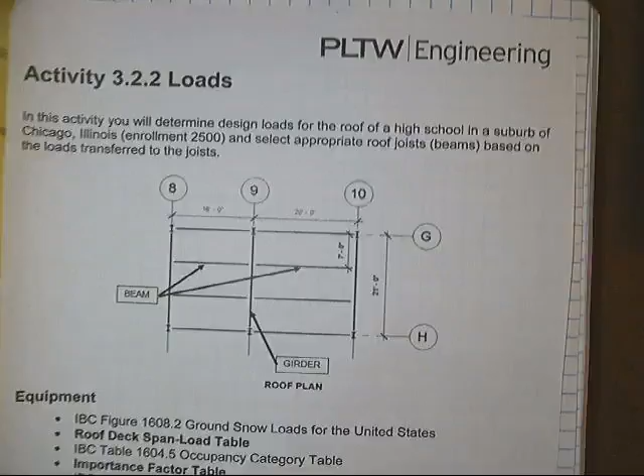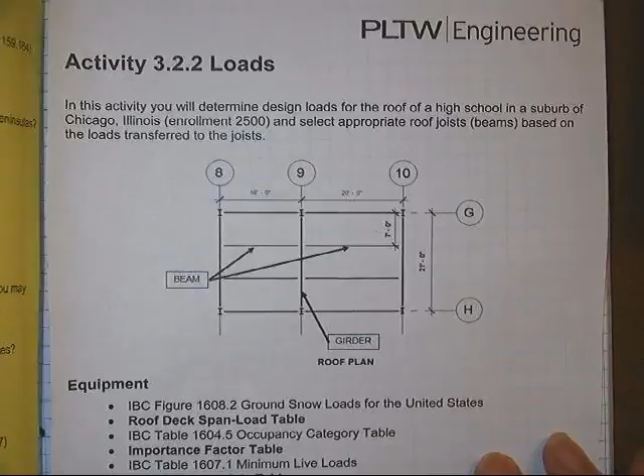Okay, here we are on activity 3.2.2, loads. You should have watched the PowerPoint and taken notes. You will be using the information from the PowerPoint along with looking up information online in your IBC 2012, and these are the different tables you're going to be using.

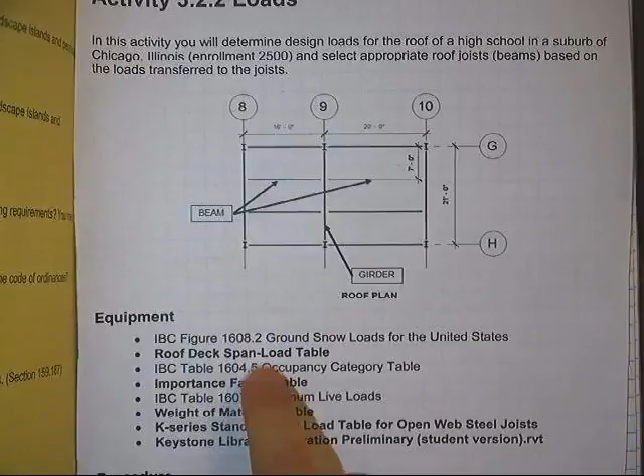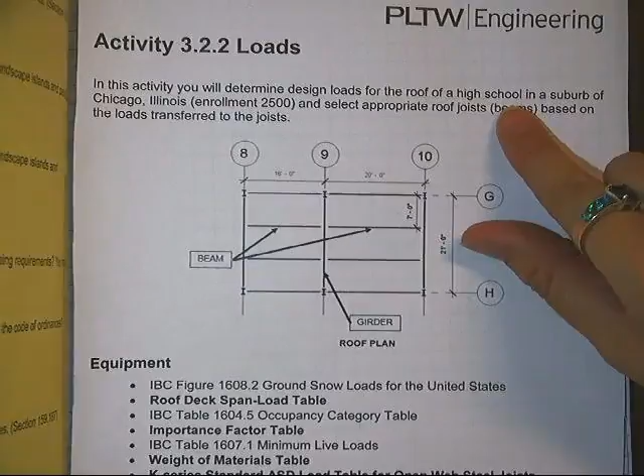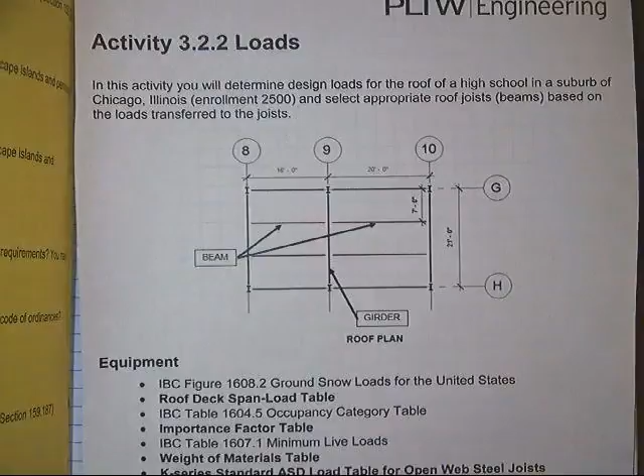It's important to note that this first part, number 1 through 7 on this activity, is this scenario where we're looking at a high school and we're going to do the loads for a roof of this high school located in Chicago. On number 8, you'll do these same calculations for your library, but for now we're doing it for this high school example.

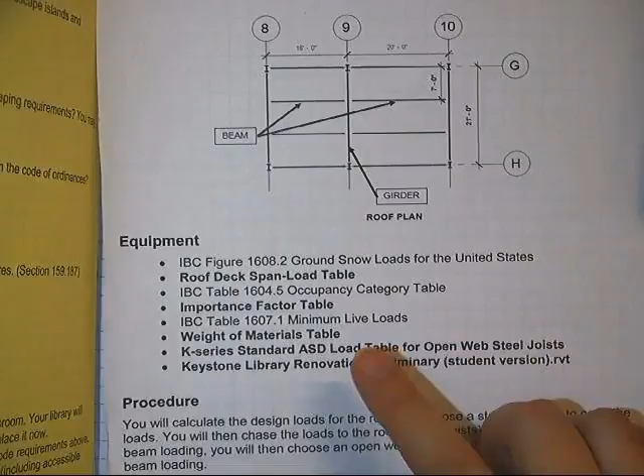You will be using all of these different places to look up various information to answer the different questions here, and we will have to reference back to this picture.

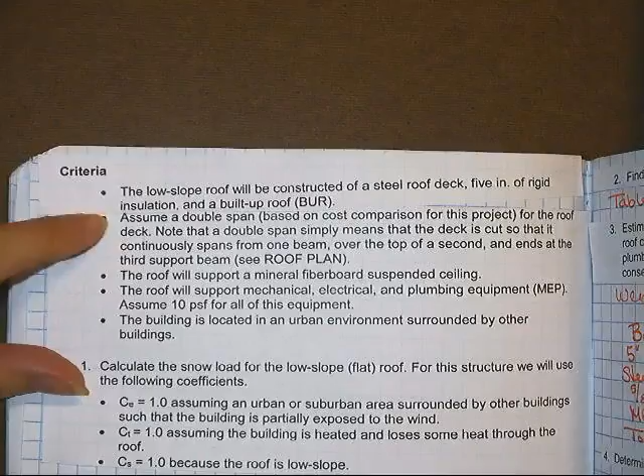You will be using this criteria right here. This is describing the information we would need to know for the high school. You'll then use your own information when you get to your library on number 8.

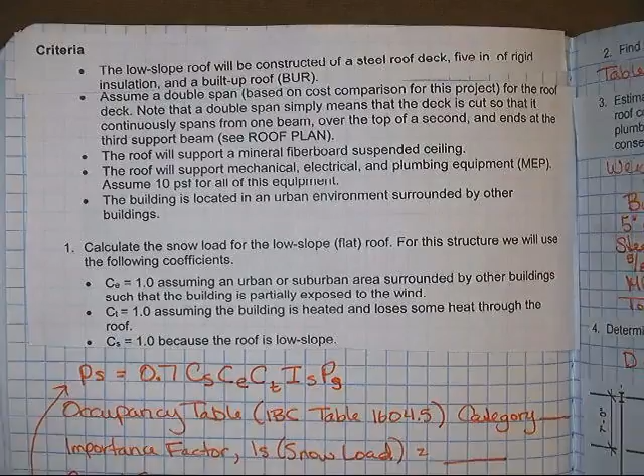You are expected to show all of this work in your notebooks and do all the calculations. I'm going to get you started here on this video, but when you work it in your own notebooks, you do need to show all the formulas and all the work, just like normal.

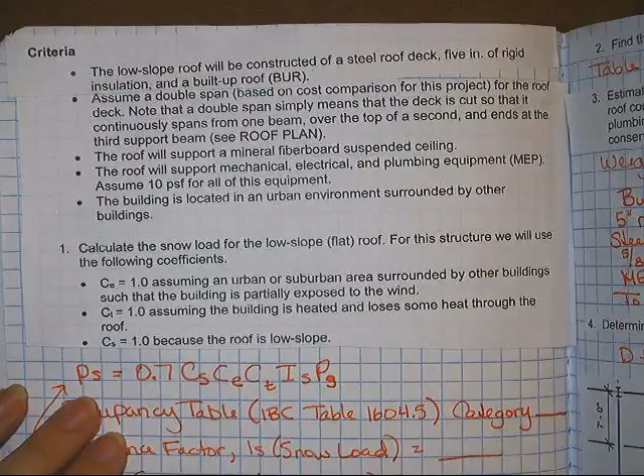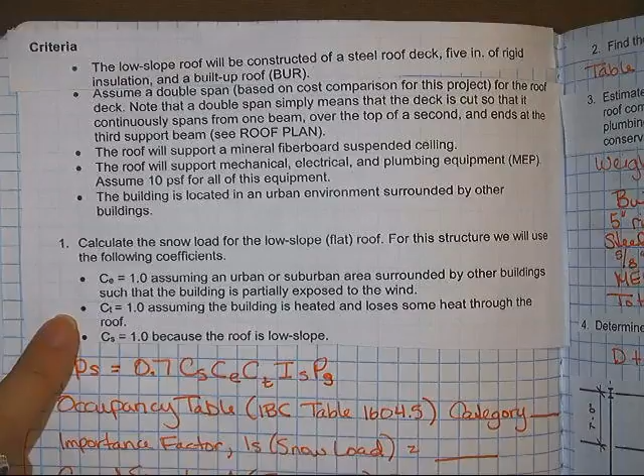So number 1, we're going to start by calculating the snow load for the low slope roof. It already gives me some of the information here. This is the formula we had from the PowerPoint, and here are 3 of the numbers to fill in. The other ones we'll have to figure out ourselves.

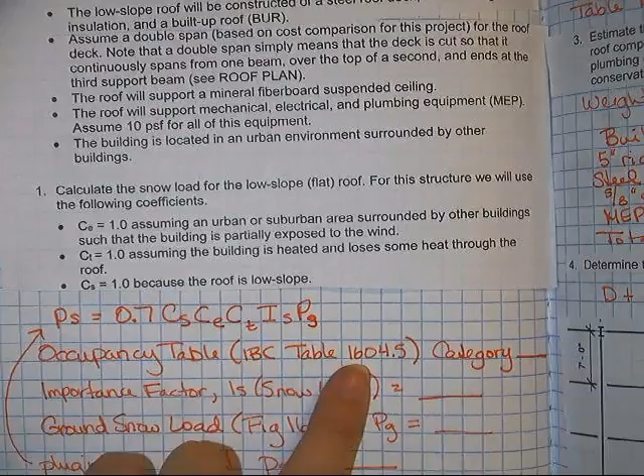So the first one we're going to do is look at the occupancy table. You'll need to look at this table to find your own information for your library, but for the high school I have a little part of that table right here.

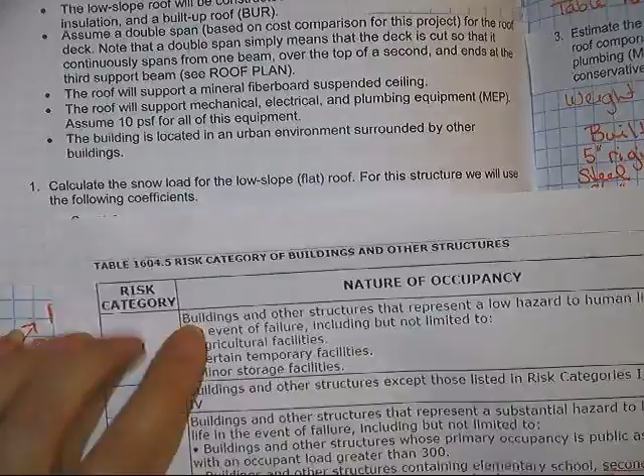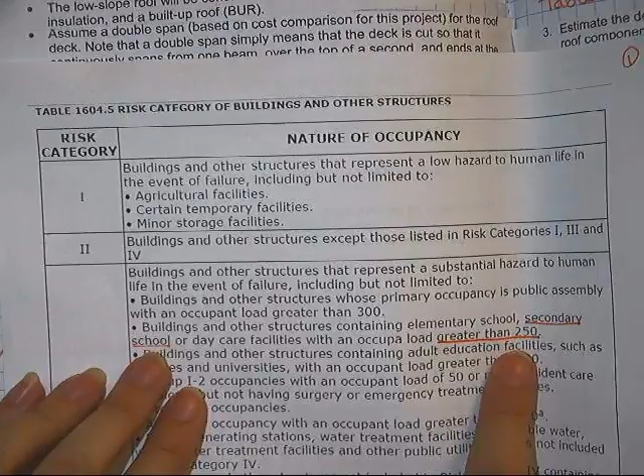1604.5. For the high school, I keep looking down till I find a high school. I have it highlighted right here: secondary school, greater than 250. They had 2,500 students, so that makes this a category 3. So you'd write that down.

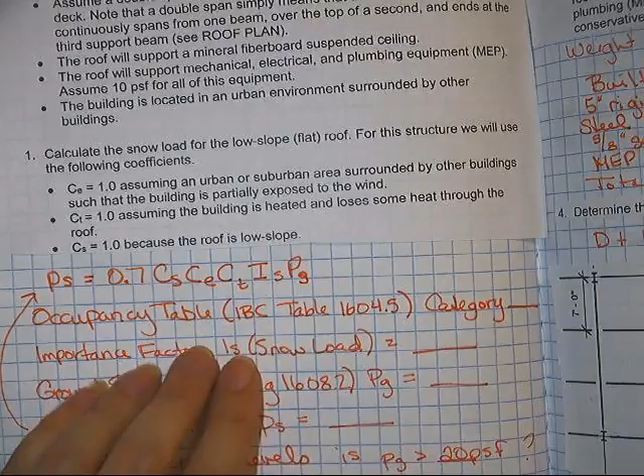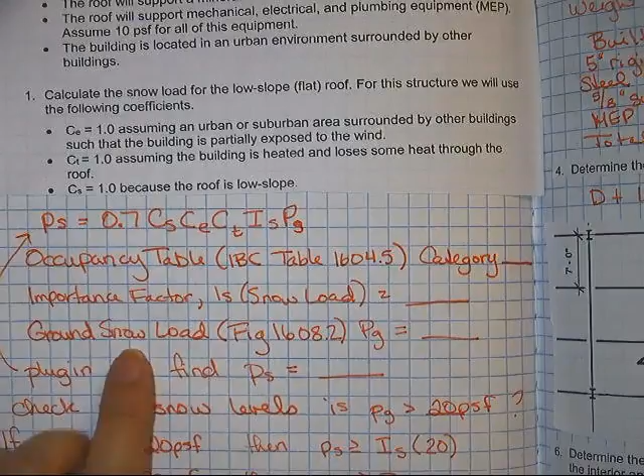The importance factor comes from the importance factor table that I gave you, and we just look up category 3. That's an Is of 1.1. So write that down. Now the ground snow load, we actually need to consult the map on this figure in the IBC.

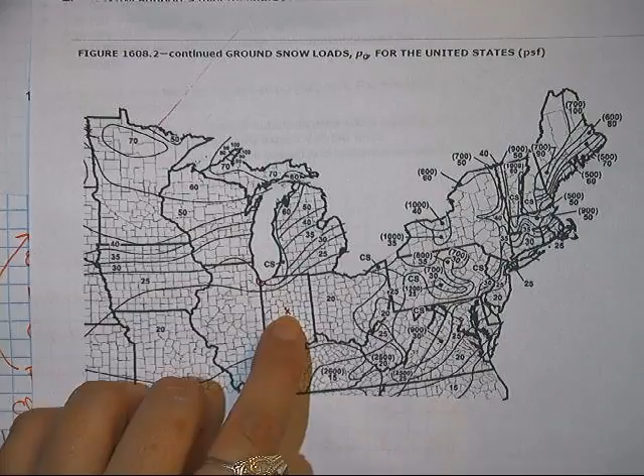So I have it right here. Chicago is located right here. You do have to know where the city is you're talking about. Chicago's right here, so it's in the 25 PSF section. Noblesville will be right here, so that you know when you get to your library. So we'd write down 25.

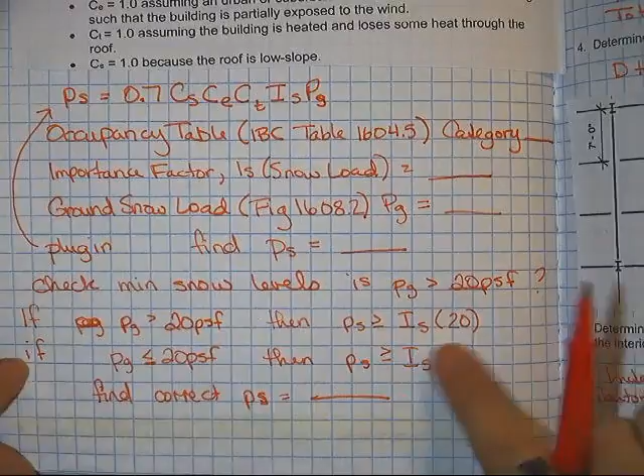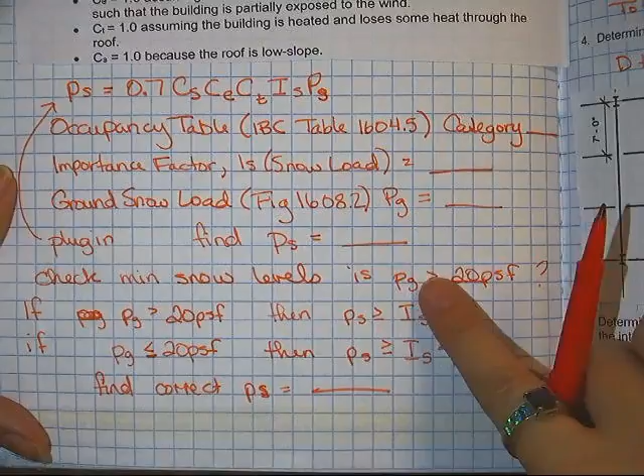Now you need to check the snow levels. This is where these two little parts that were in the PowerPoint come in, and you need to check which category you're looking at. For the high school, we just got 25 here, so is 25 greater than 20? Yes. So then we need to do this calculation.

PS needs to be greater than IS times 20. Do this calculation, and then use whichever PS is bigger, the one we got here or this one. That's what you would use.

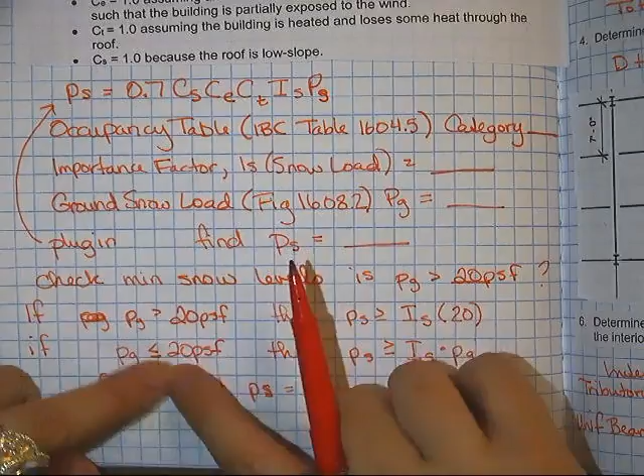If on your library PG is less than or equal to 20, then you'd use this calculation and use whichever one is bigger, this one or that one. We're always looking for the bigger load because we want to use basically the worst case scenario when we're doing designs.

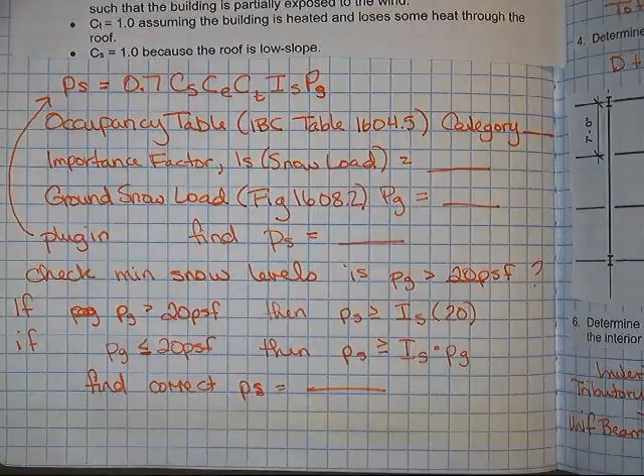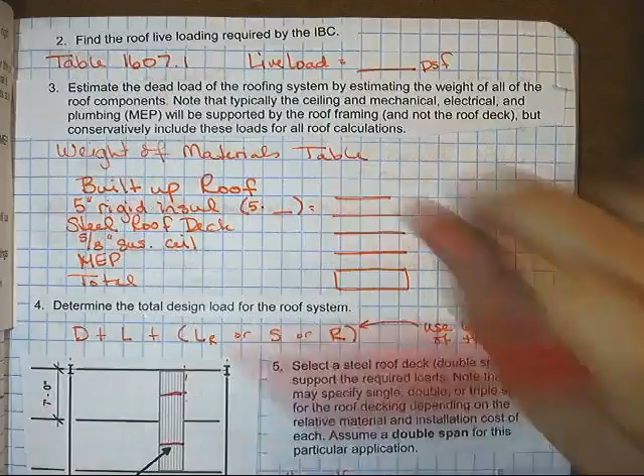Alright, number 2, find the live roof loading. So again, here's my table I'm going to look up in. This table is actually pretty long. I just snipped out the part that applied to us, but it goes 1 through 26. I just snipped at 26, which is roofs.

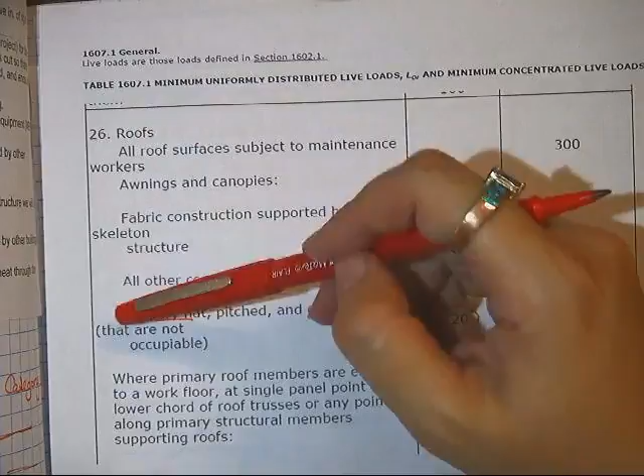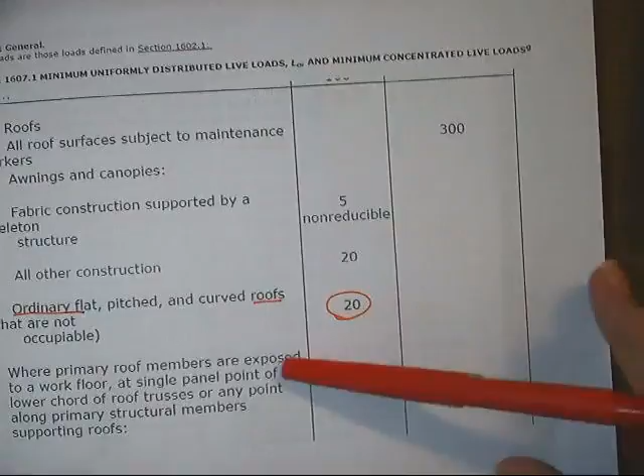And we know it's an ordinary flat roof because it told us right here under our criteria, low slope roof. So I know I'm going to use 20 PSF for my live load for the roof. So this is my LR.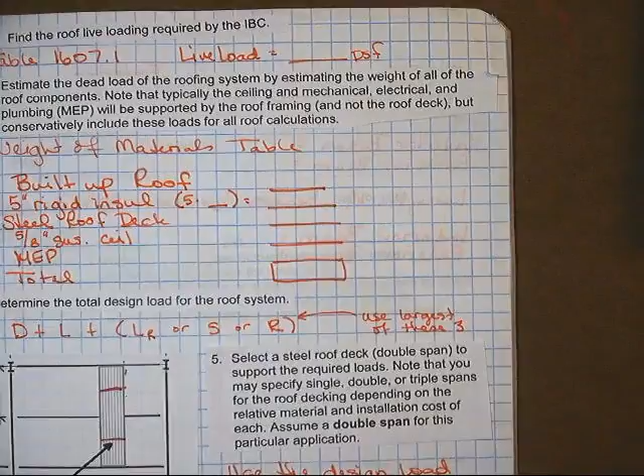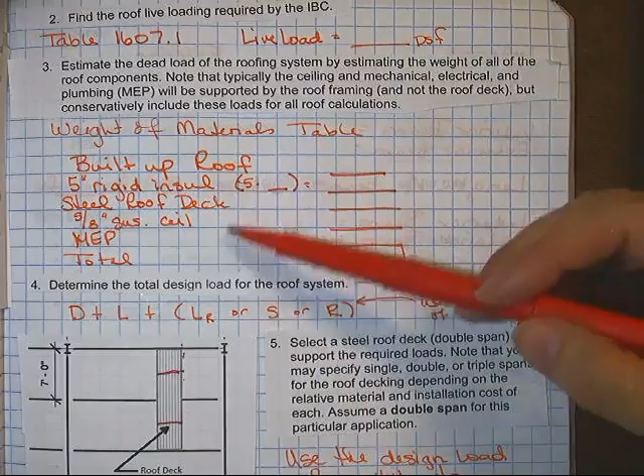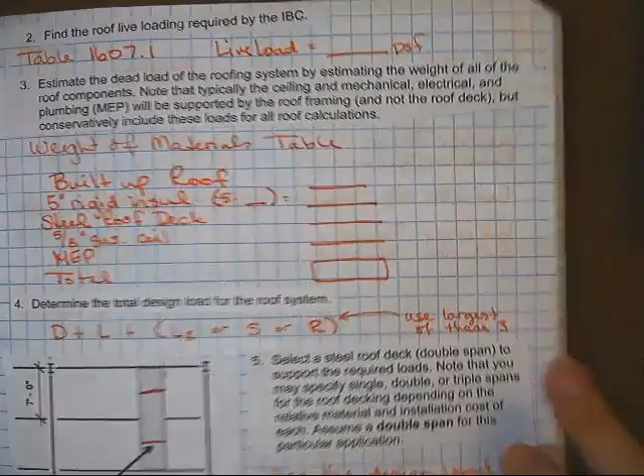Write that down. Now I need to figure out how much the dead load of just the weight of the roof itself weighs. I'm going to do that by looking it up on the weight of materials table. I found all these items that go into the roof looking over here. It lists out exactly what items are in my roof.

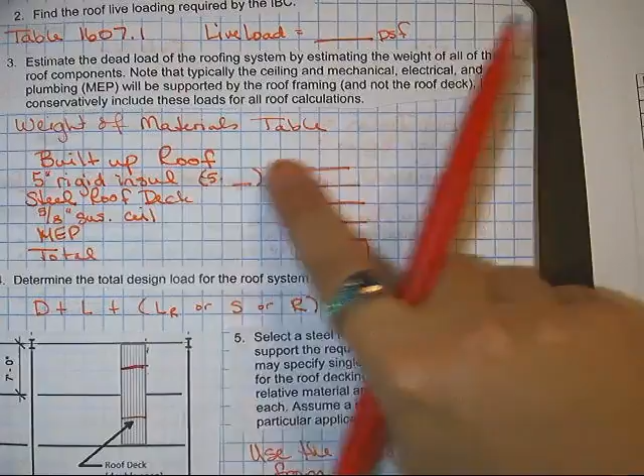So I'm going to use this information to make a list of all the items. Built up roof - I just look at my weight of materials table, and roofing materials is right here, built up, 6.5. So I write that down right here. By the way, you should have this entire thing copied down, including the words along with the numbers to show your work.

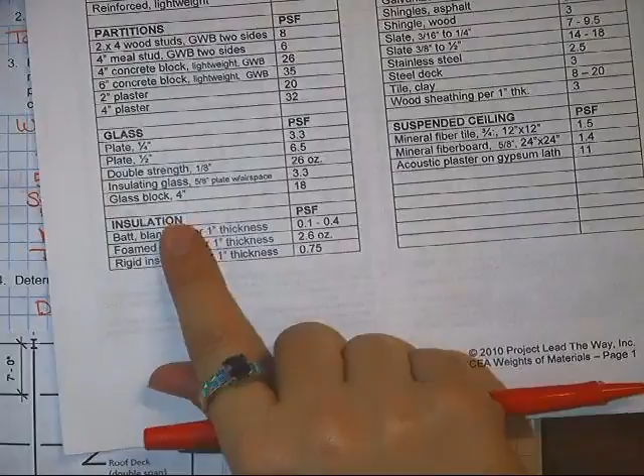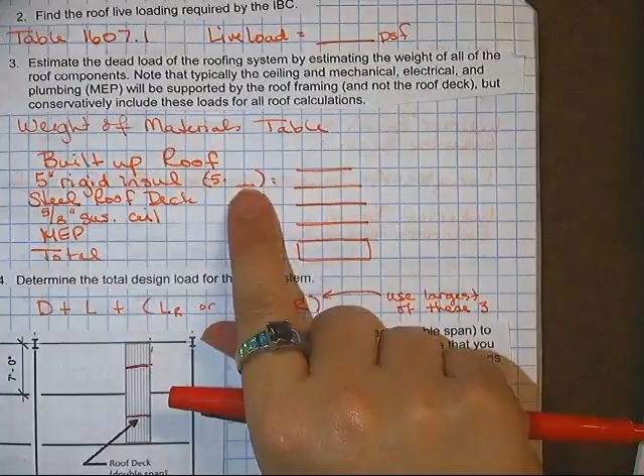5-inch rigid insulation, so I'm going to look that up. Insulation, rigid insulation per 1-inch thickness is 0.75. So how do I find out what 5 inches is? Well, I do 5 times 0.75, write down my answer there. Continue looking these up and writing down the numbers.

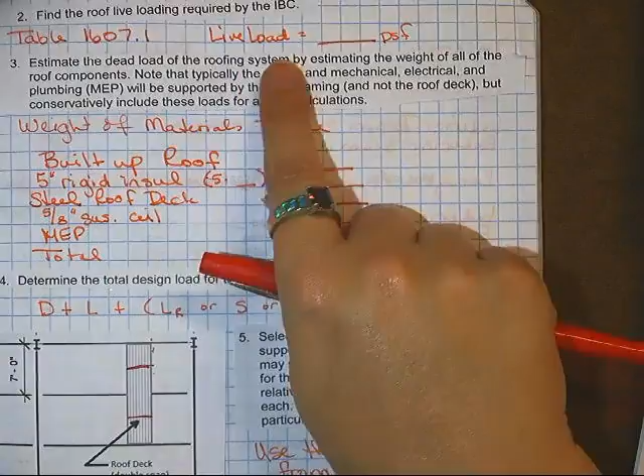MEP is not going to be found on the materials table. Notice MEP stands for mechanical, electrical, and plumbing. If I look over here, it told me what to use for MEP. It said assume 10, so that's what we're going to put down right here for MEP. Add these up to get your total dead load.

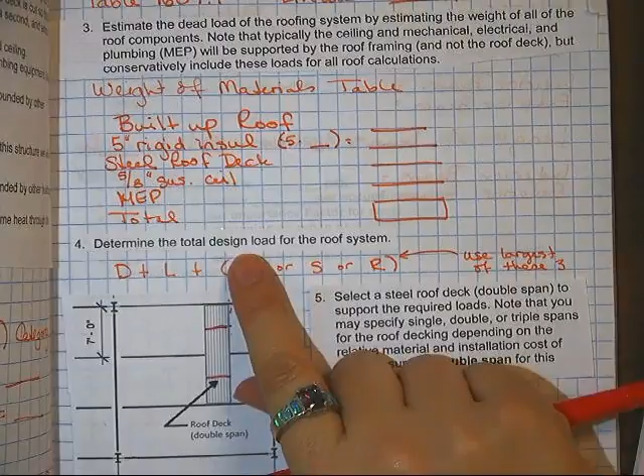Now we're going to calculate the total design load. This is what we need to use to figure out what kind of beams we need in our roof.

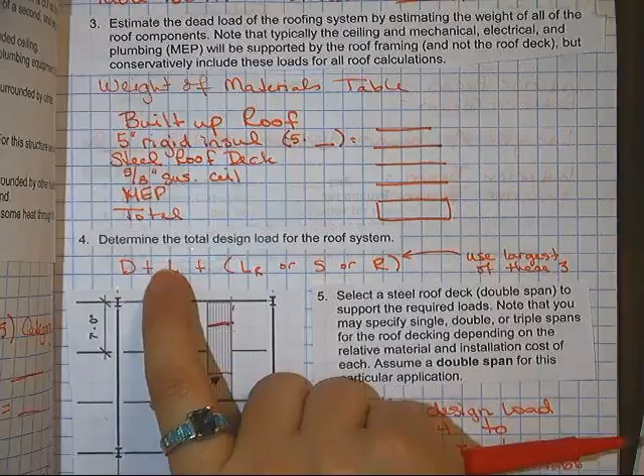Our dead load, we just calculated here. A live load, there's no live load on the roof other than the roof live loading, because we don't have people up there dancing around on the roof of the school. So there's no live load.

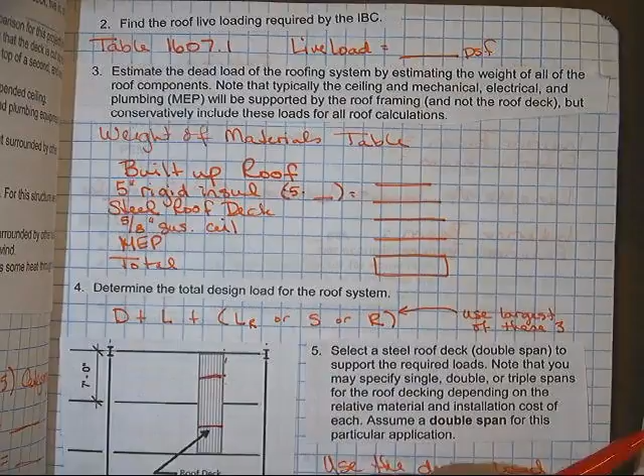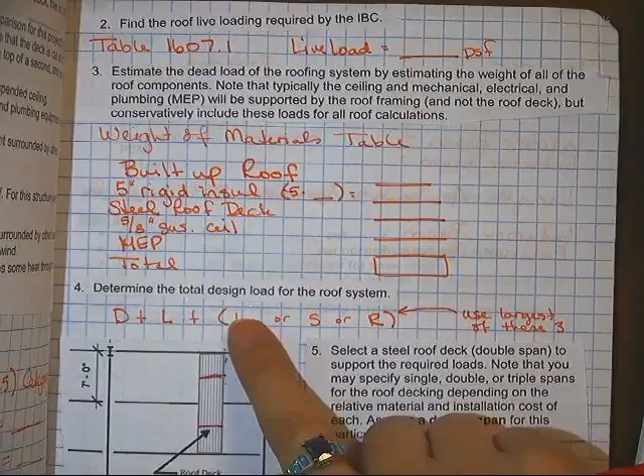This one is this one here, and our snow load came from the previous question about snow. You just need to use whichever one of these is the bigger one. That's what this means—when our formula has this part, we use whichever one of these three is the largest to do the calculation. Find that, and that's going to be your total design load that we're going to use later on.

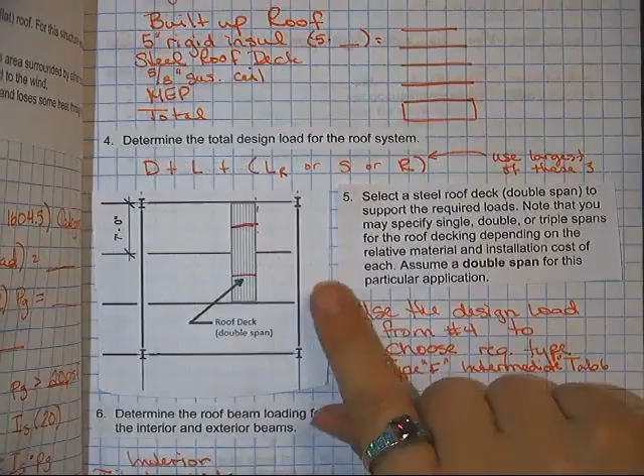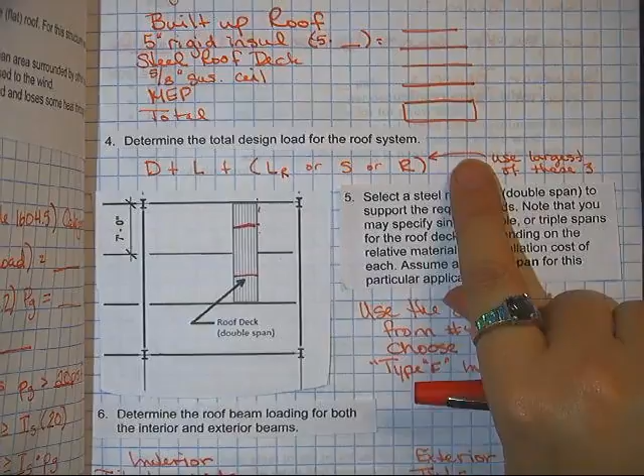So now they gave us this picture, and they asked us first to find the steel roof deck, double span. So I need to use the design load that I got right here, and I need to look up on this table. It's in your packet.

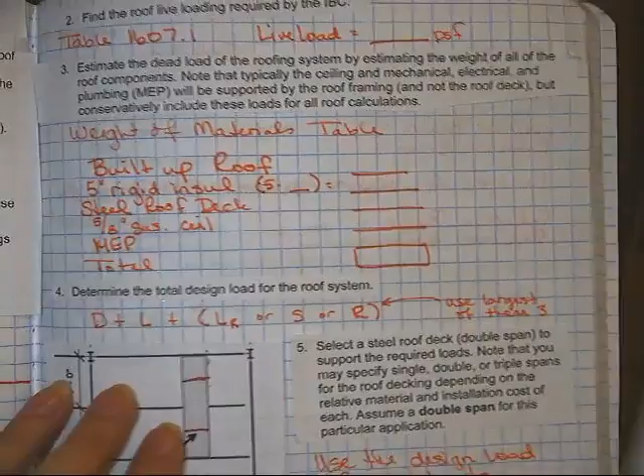I need to look up what size of span I have. This says it's got a 7-foot span right there, and it told us to use a double span. So we go over to 7-foot spacing and then go down to the double span.

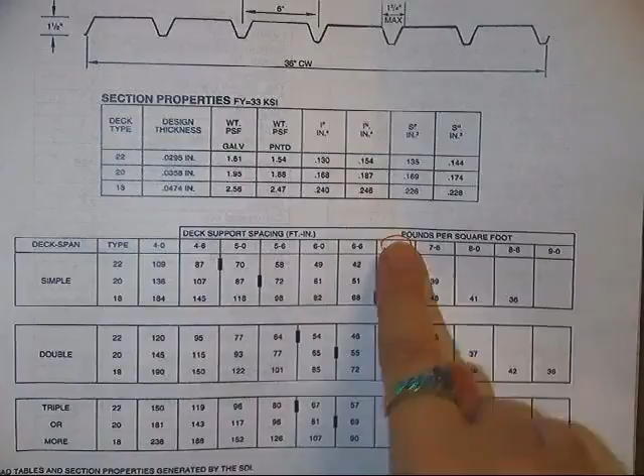I need to pick one of these three, whichever one is just larger than what we found in question number 4. And that'll tell us if we've got a type 22, 20, or 18 that we're going to use. Write down the type you're going to use here.

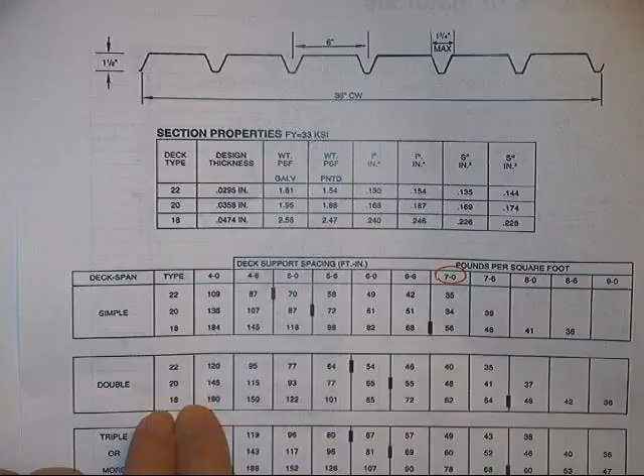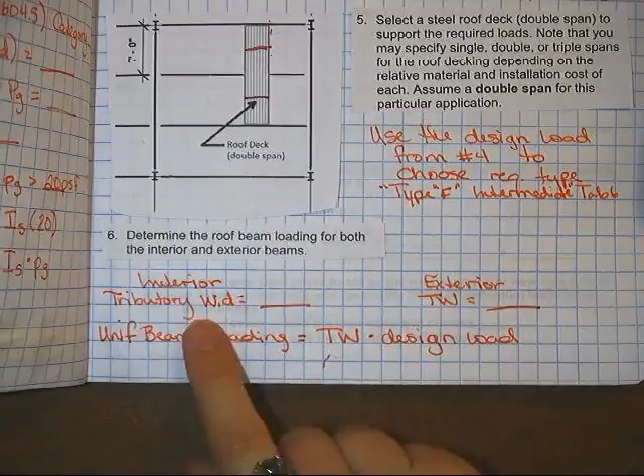Number 6, determine the roof beam loading. So first we need to find the tributary widths. We talked about that in the PowerPoint. And we're going to do it for an interior and an exterior beam.

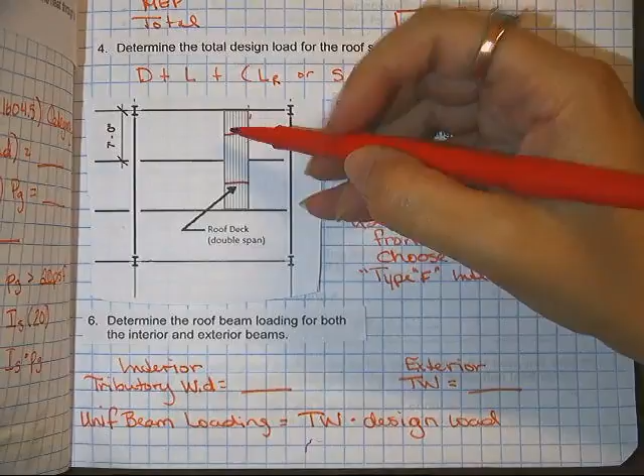For an interior beam, that's like this one right here. The width is going to go from the middle of this span to the middle of this span. So figure out if these are each 7, how wide this is going to be, and write it down there.

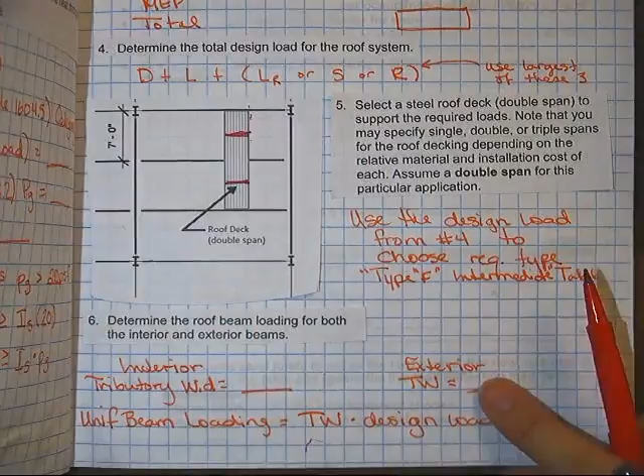An exterior beam is like this outside one where it's going to go from the middle of here to the edge there. Figure out how much that's going to be and write it down here.

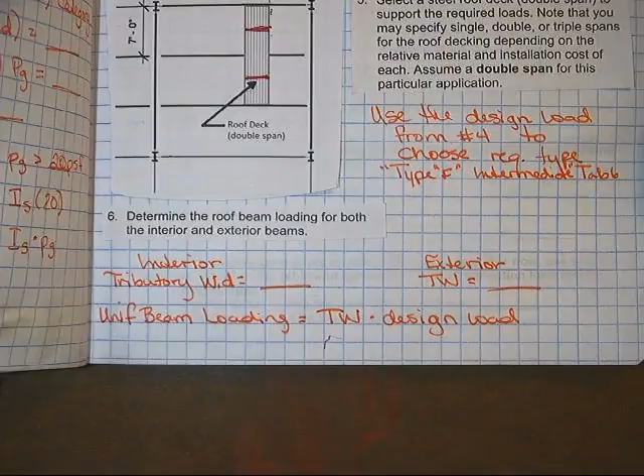Now to find the uniform beam loading of each one of these, you just take its tributary width for interior times the design load we found in number 4, multiply them and you'll get the interior. Then do the same for the exterior.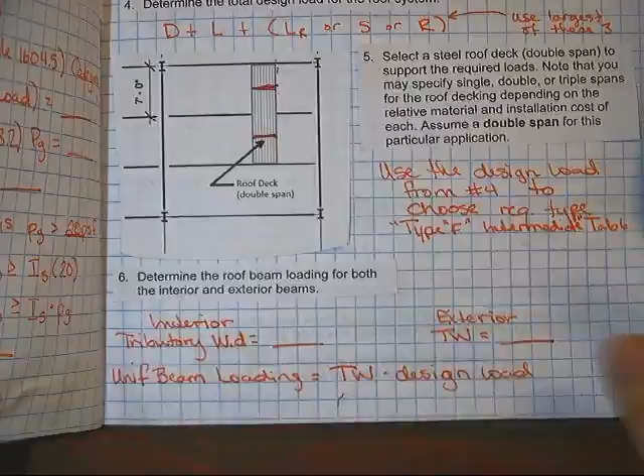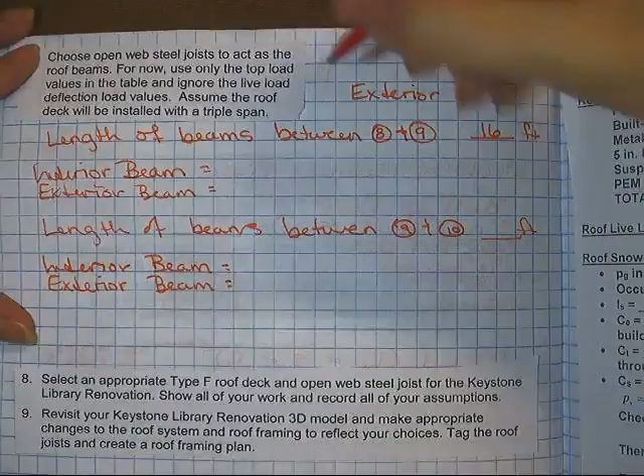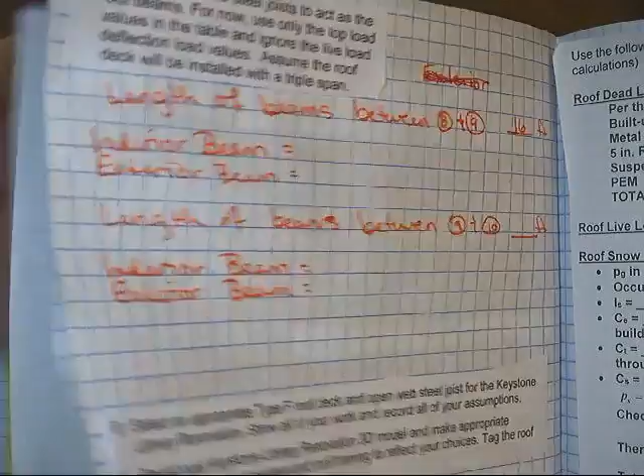Number 7 is where we're actually going to choose the steel joist that we need. We're going to do it again—first between beams 8 and 9, and then between beams 9 and 10. If we look back at our original picture, we have 2 different lengths there.

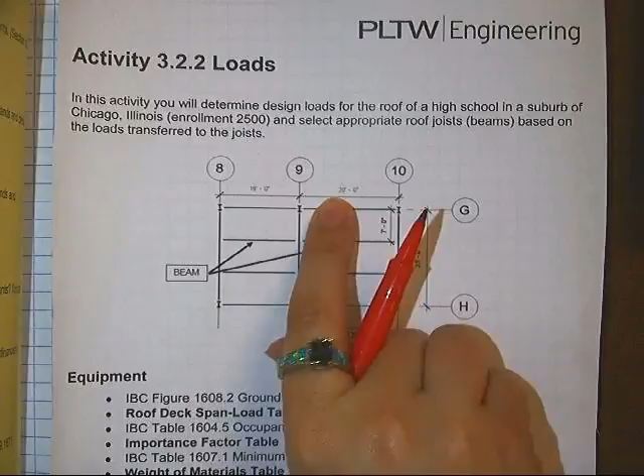Look at this length here for between 8 and 9, and this length here for between 9 and 10. You're going to need to use both of those lengths. So we have the length here, between 8 and 9, it happens to be 16 foot, and then write down what it is between 9 and 10.

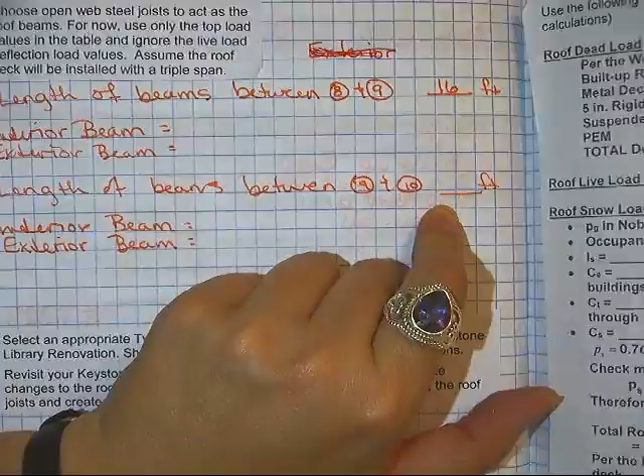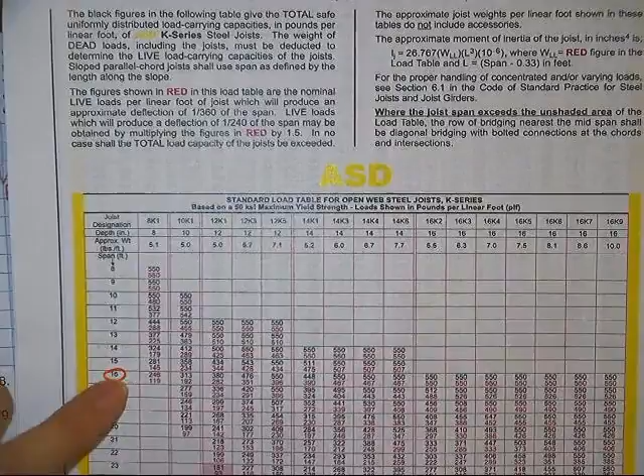Now we're going to use our tables, this table right here, and look up a 16-foot length. So I go right here down to 16, and then I'm going to go across on this table until I find the loading that I got on question number 6.

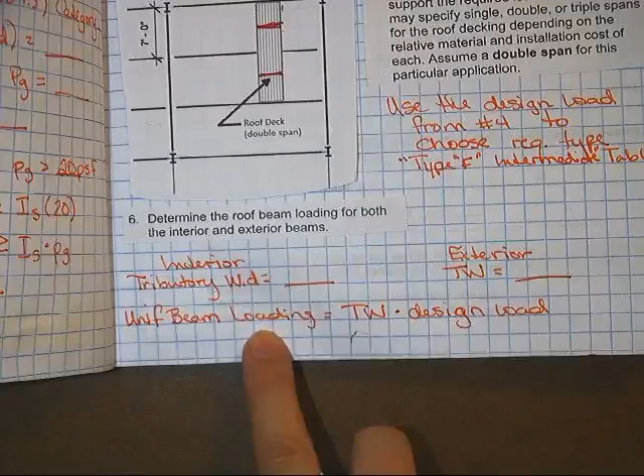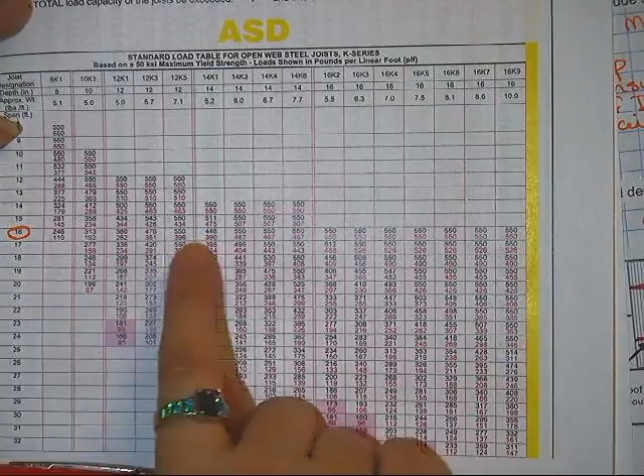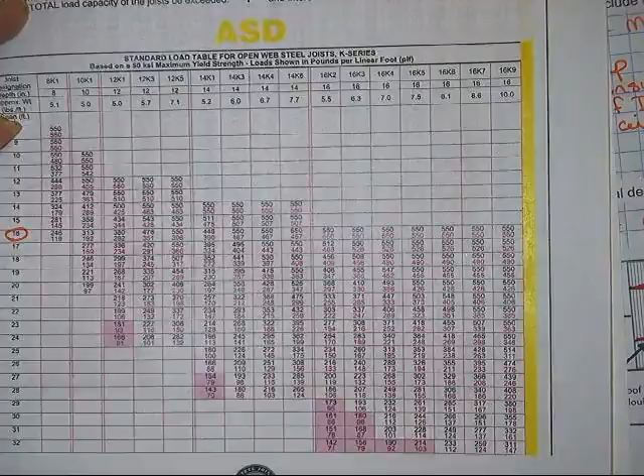For the interior beam, I use the loading I found right here, and I go across. And I'm looking at the top number. We're not going to use the bottom number right now, so I just need to go across until I find the beam at the top that goes with the number that is just bigger than the answer I got on the last question. Write that one down for the interior beam.

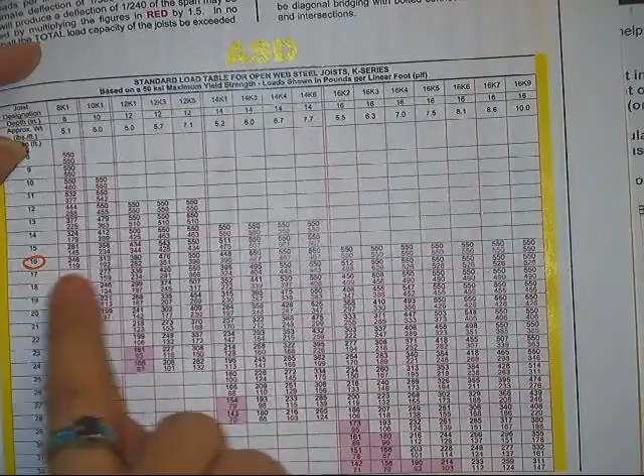Do the same thing for the exterior beam. Look across 16 so you find the one that matches the weight you had there. Then do the same things for the spans 8 and 9, between 9 and 10.

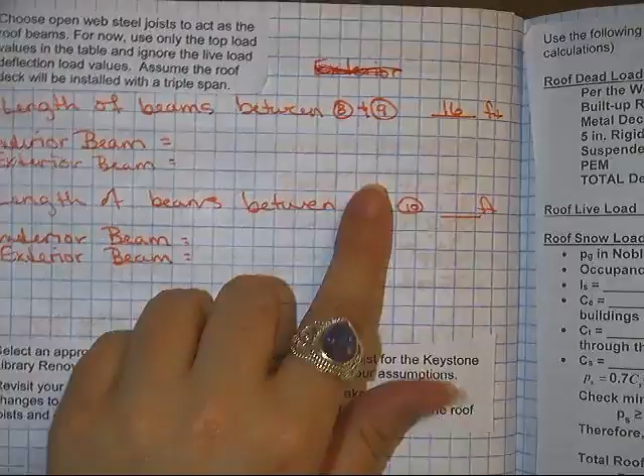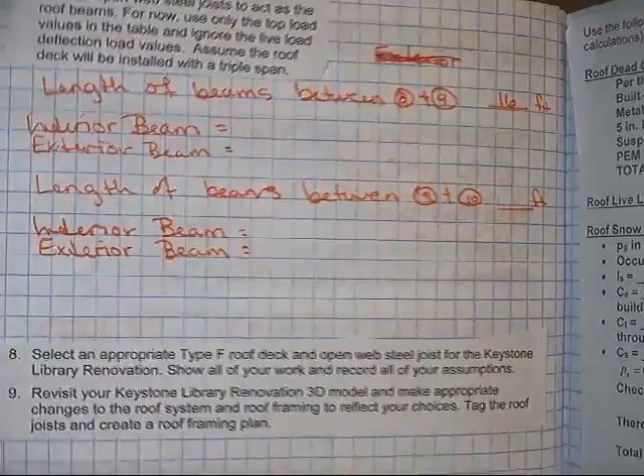Now on question number 8, you're going to basically go through all these same steps, but with your library renovation. I've made this extra page to help guide you through all those steps. I've even told you what sections to look up. So fill all this out. It's just like what we just did for the high school.

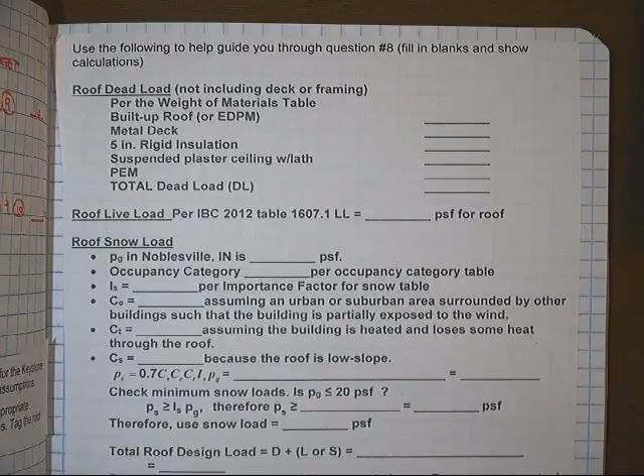You do not need to do number 9. You're not going to go back into Revit and make the changes in Revit. Okay, that's all there is to this activity. Thanks for watching.